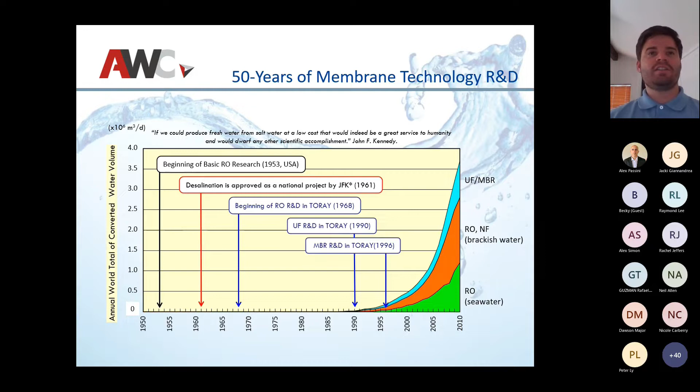We'll touch a little bit more on the membrane R&D technology in general and how Toray fits into it as well. As you can see, in 1953 was when RO started. And then in 1961, JFK approved desalination as one of the national projects, given the importance of water. In 1968 was when Toray got involved on the RO side of things, and it's just expanded from there. And you can see in the 90s, we joined on both the UF and the MBR technologies as well. So just to show how long we've been in the membrane side of things and lots of experience with all of our products. All right, now into the good stuff.

Submerged membrane bioreactors. I know there has been another webinar on MBRs before, so I'll kind of touch a little bit on it. But essentially what we're looking at here is a conventional tertiary process on the top. You've got your clarification, then your aeration basin, followed by secondary clarification and your sand filter. Obviously, your sand filter is going to be your tertiary process, but as we all know, sand filtration, while it provides good quality effluent, isn't the greatest quality effluent depending on what you want to do with that discharge water.

Whereas on an MBR process, depending on how you want to do it, you can even eliminate primary clarification like you can on a conventional. But what we're looking to do here is really combine the biological and a membrane process into one so that you can get really, really high quality effluent that can be either used for discharge, reuse, or even direct feed to an RO.

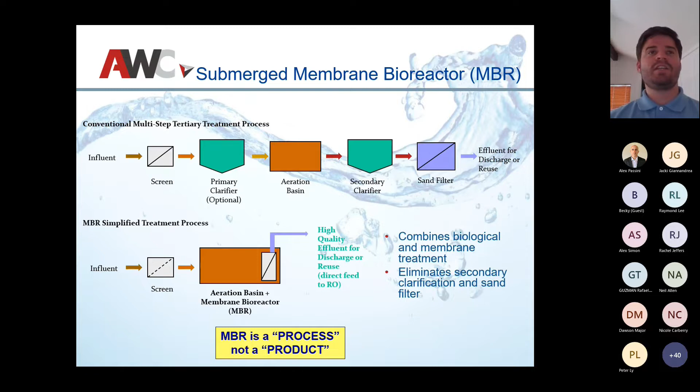So here in California, where I live, even though we are pretty forward thinking about water, we're not as forward thinking as it is in Canada. So we know a lot of them use MBRs up there. So again, it really just gives you a good quality effluent water for discharge. And it combines a lot of the processes together so that you can really shrink the size of that total treatment process.

So you may be thinking, well, why would I want to go through all the extra effort of an MBR? Really, it comes down to that effluent water quality and what it allows you to do with it. Obviously, some of these parameters are driven by the biological process ahead of it and partially removed by an MBR. Things like BOD, if they're in a soluble form, are obviously going to pass through our membrane. But if it is bound up to other solid particles, then it can be removed.

And then things like suspended solids and turbidity are really what the MBRs are honing in on to remove. So again, we can have a nice quality effluent. And I'll touch on it in a minute, but one thing that I did mention on the previous slide is we do like to stress that MBR is a process. It's not a product.

So expecting to be able to drop a membrane bioreactor into, let's say, a secondary clarifier and just make an MBR start working, while it's possible, it's not really always going to work that way. So it is really important that you consider the process as a whole. And the reason I mention that here is because some of these limits like TNs and TPs are also impacted by our biological process ahead of it. So that is really important to remember that the MBRs are really geared towards suspended solid and turbidity removal.

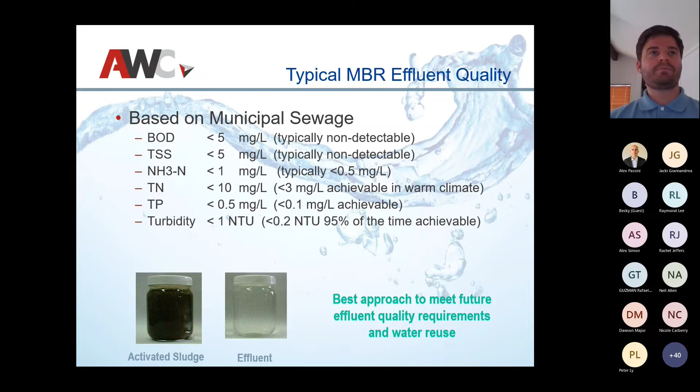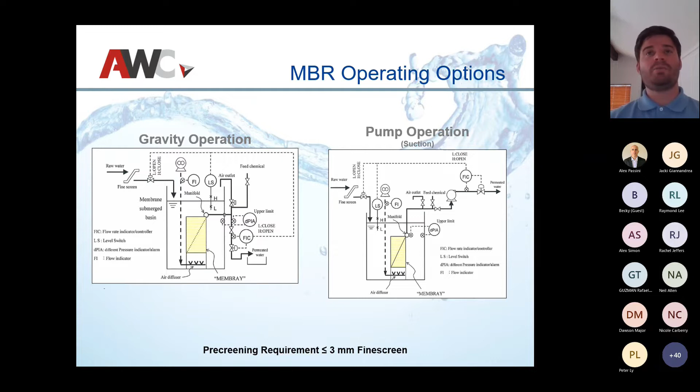If you start to lose aeration, that's when you start running into the other two problems of clogging and consolidation. So membrane clogging is going to be next. We've got these little particles in the presence of the membrane, and they're going to start passing through the pores eventually if they're too small and our particle size isn't optimized in the MBR. And those will start clogging those pores, harder to get out.

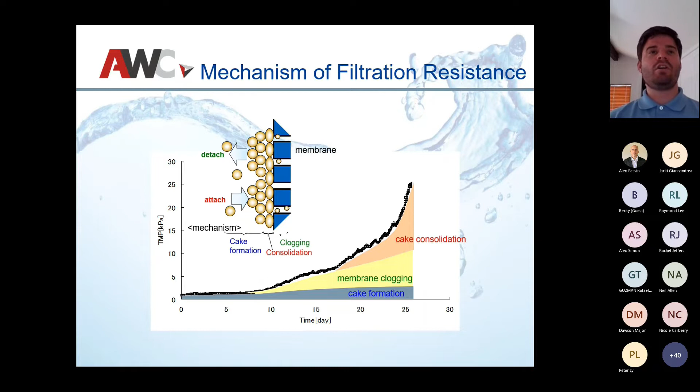So some of the critical operating parameters surrounding MBRs in general, I'm sure these are not unique to submerged: effective pre-screening is absolutely critical. So if we have long fibrous materials, or even, it's unlikely, heavy debris that could damage the membranes, it's really, really important that we effectively pre-screen those to remove them from the system so that they're not ruining these nice fragile membranes.

Maintaining aeration, I'm going to say, is one of the most critical, if not the most critical. You can get away with some of the others being not optimal and still be able to run, maybe not the happiest, but you can still run it. But if you lose aeration, like we discussed on that previous slide, is when you're going to start running into a lot of these other problems like cake consolidation and clogging of the membrane. So aeration is absolutely critical to maintain properly.

And lastly is prevent the airlock of the pump. This is more of just an operational nuisance that we see. A self-priming pump can help you eliminate this issue, but again, we're really just looking at it as more of a nuisance than anything. You can also use things like an eductor to suck the air out as needed.

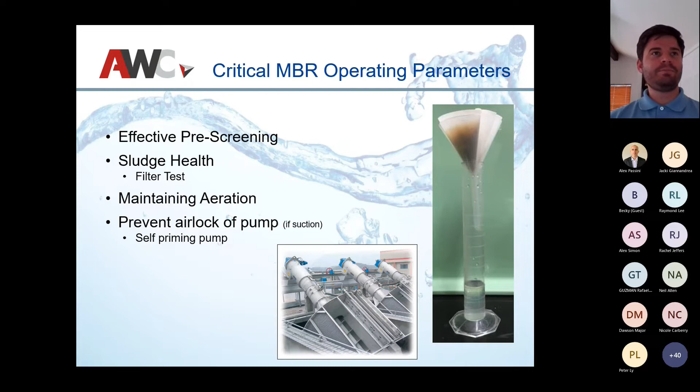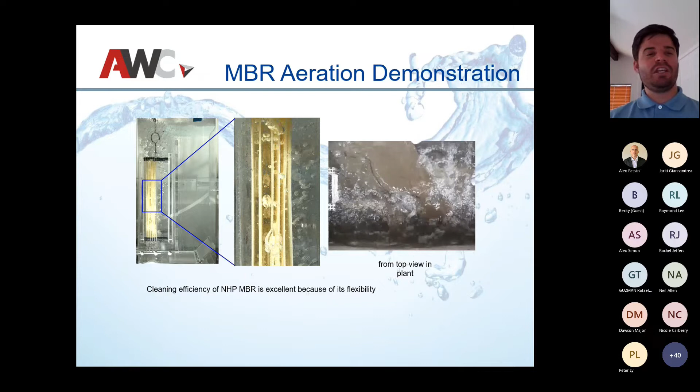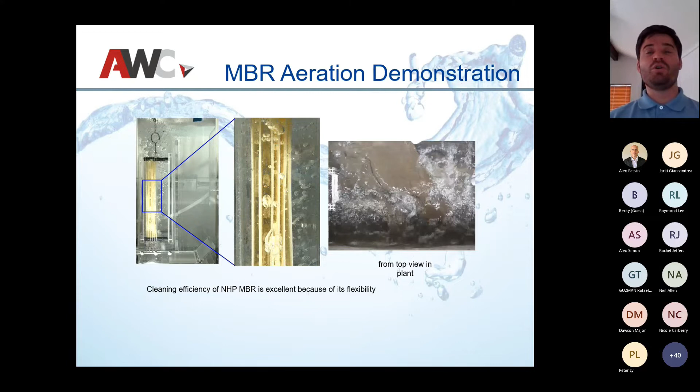And the last video, I really like this one because if you look closely, you can actually see a lot of the cake coming up and out from between the membranes. And again, this is just really to hit that point home that as long as we keep it in just a standard cake formation, we're not so bad. Once we get into that consolidation step that we're really squishing it into the membrane surface, obviously we're going to have a much harder time removing it and require things like a physical hose or something like that really to wash that sludge out.

So how do MBRs manage the fouling? Obviously on the flat sheet and the hollow fiber, there are some commonalities, but there are a few differences as well. They both have aeration on the hollow fiber and flat sheet, but on the flat sheet side, we have a few different, I guess you would say, configurations of air that we can offer. The standard coarse bubble, which everyone's pretty used to, and then we've got medium or fine bubble as well.

The nice thing about the medium and the fine bubble that we can offer now is that they're both, I wouldn't say clog free, but they're kind of the EPDM sock style. So they really don't clog like a coarse bubble would, where it's just a pipe with holes drilled into it and you can get sludge intrusion into them to clog it. And so again, using those medium or fine bubble are really good options to make it a much more operational and friendly system. And the medium bubble actually brings us up to the same flows as the coarse, so it's kind of nice that way.

On the aeration side for hollow fiber, the one benefit they have, and we'll touch on it a little bit later, is they do have intermittent aeration depending on which configuration you have. And some manufacturers even have unique leap type things where they do one big bubble or things like that. Hollow fiber, the one unique aspect is you can backwash it. The one downside to this is obviously you do lose some of your recovery, and backwashing does make your sequencing of the system quite a bit more complicated.

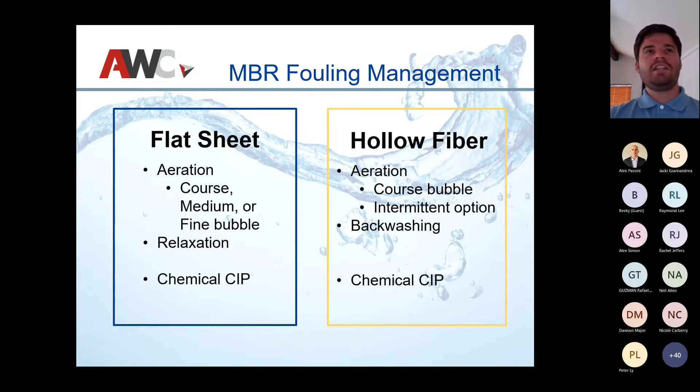On the flat sheet side, you think, well, if you're not backwashing, how are you getting rid of those solids? We do have a relaxation step. Essentially, we just turn the filtration pump off. On an average application, we're looking at 9 minutes filtration and 1 minute relaxation. And again, that relaxation step is really to do what we showed in that previous video, to let that cake formation just really get removed from the membrane matrix in between them. And then lastly, both of them obviously have a chemical CIP option, more on an as needed type of basis, but it is an option for both.

So real quick breakdown into the advantages and disadvantages of each. I may have some biased opinions, obviously, but we'll put that to the side for now. One nice thing about flat sheet is, as I mentioned before, you can operate in either suction or gravity filtration, and that gives you flexibility. They are extremely easy maintenance in the fact they have very minimal moving parts. You really just have your membrane block, and then you have your filtration pump, a few valves, and your aeration blower. So it's pretty straightforward and simple, very minimal sequencing. They can also operate at higher MLSS values, which we'll touch on later.

One of the disadvantages to flat sheet is, and we'll be pretty honest, is that our slightly lower packing density and energy efficiencies make us a little less competitive on large facilities, typically anything larger than 5 MGD. Their intermittent aeration is one of the big reasons for less energy usage. Obviously, we are 100% aeration all the time, so that is one downside.

Obviously, on the hollow fiber side, we do have improved packing density and energy usage, and backwashing is possible. But depending on who you are, you could think backwashing may actually be a disadvantage because it does reduce recovery. And also the fact that hollow fiber have to operate at lower MLSSs does require a larger pretreatment basin. I'll touch on that a little bit later, so I won't go too much into it.

But next, external. Again, I'll be pretty frank here. We don't have a huge amount of information. A lot of the companies are a little smaller, and we don't see a huge amount of them. But one thing that we can see is operational flexibility, given you have the ability to push at the pump or pressure. The pump gives you a lot more flexibility to push water through, especially on nasty applications.

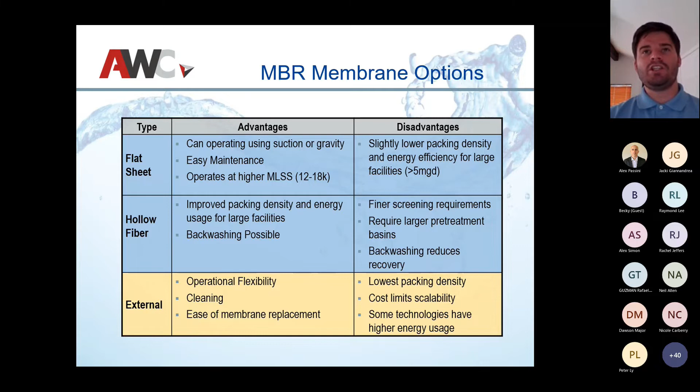So as I mentioned before, just to give you a visual of what the flat sheet versus hollow fiber MLSS difference really gives you, you can see here on the top we've got our flat sheet MBR, and typically on the low end we operate at 12 grams per liter, or 12,000 milligrams per liter. On the high end, we're looking at 18. As you can see, the hollow fiber on the low end, you're looking at around 4, all the way up to potentially 10.

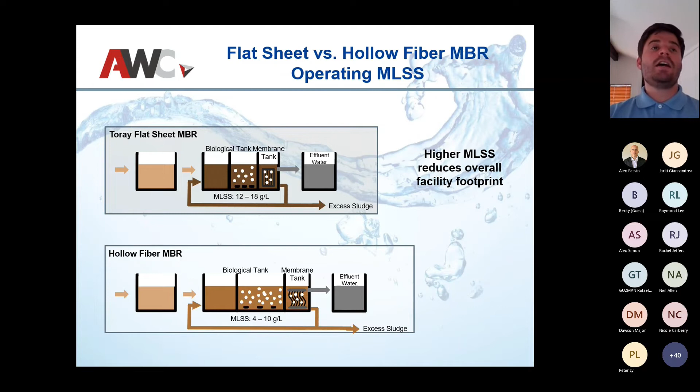And really what this means is, while our packing density may be a little lower, and I will admit I didn't size this correctly, our membrane tank should be a slight bit bigger because our packing density is a little bit lower. The overall treatment process footprint can actually be much smaller due to that higher operating MLSS. So if we compare 12,000 versus 4, that means our primary process can be 1/3 the size it would be for a hollow fiber system.

And looking at a side-by-side operating comparison, this is a nasty industrial application, and that's really where, not that we shine, but we tend to really see the difference between hollow fiber and flat sheet. Our flat sheet works great on municipal as well, but the one downside to hollow fiber is, due to all the little fibers, you have a potential to collect foulants up at the top of the headers where the aeration is pushing it all, whereas on the flat sheet, we can slough all that off and don't run into that same issue.

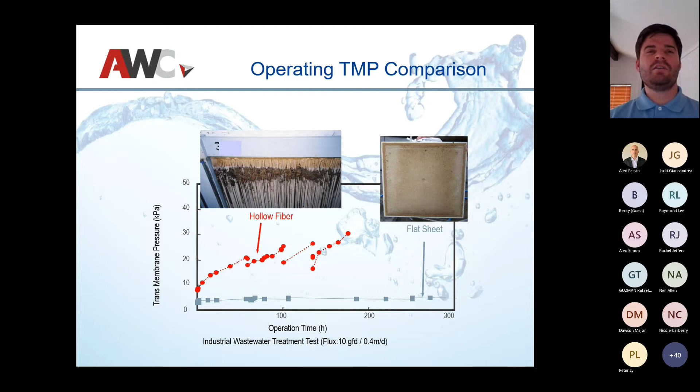And that's what results in the TMP difference. You can see the hollow fiber had a much more rapid TMP increase versus the flat plate. Another nice thing about the flat sheet is, if you do get yourself in a bad situation where you've completely plugged it up and look like the hollow fiber, it's much easier to rinse them off with a low pressure hose and not damage the membrane than it would be for a hollow fiber, where you risk breaking membranes a little easier.

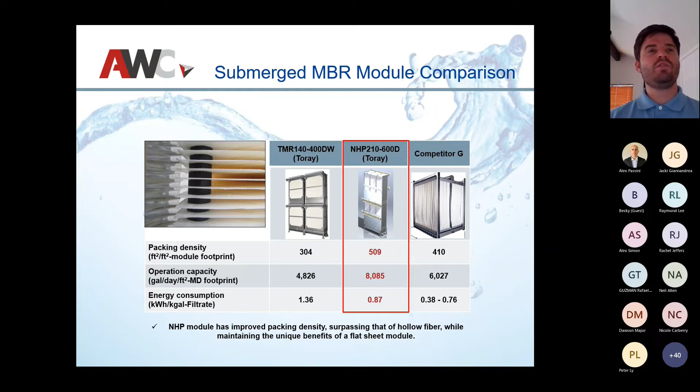Really quickly, the only reason I like to touch on this one is to show we have been improving our packing density to get closer to some of our big competitors in the MBR space. I will admit that the energy consumption is a little bit higher due to our continuous aeration. But again, we're getting closer and closer. And for small facilities where you're really looking for a simple, robust process, going with these flat plates just makes it so much easier because there are so few moving parts and so few things to troubleshoot.

I'll touch on this just really quickly to show you a little bit about the flexibility of our modules. Obviously, we've got various different sizes, and the one nice thing about them is they're all essentially stackable. So it kind of gives you the flexibility of messing around with how you see fit.

The smallest one on the left-hand side would be perfect for containerized units. That one in the middle, the 300S, is perfect for municipal applications. And then that one, the double high, the 600D, is perfect if you've got minimal footprint and you're really, really trying to optimize how much membrane area you can get into that small space.

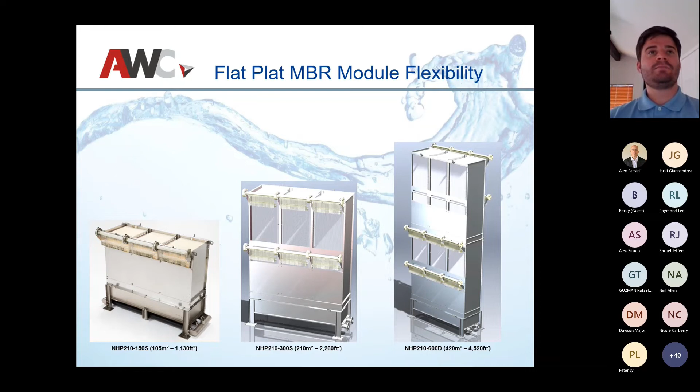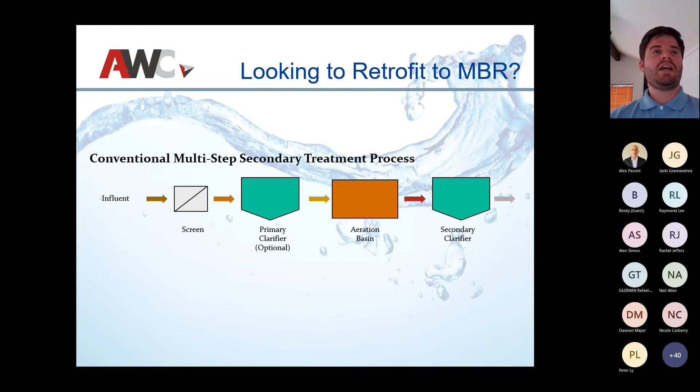And lastly, what we'll touch on is if I've got a conventional multi-step, maybe secondary treatment process, and I really, really wanted to do MBR, how difficult would it be for me to do that? And in reality, it's actually pretty simple. Many times we can actually retrofit a secondary clarifier to become an MBR basin.

And what this means is now you can make your current secondary clarifier both your secondary and your tertiary treatment, all in one step. You don't need to increase the facility size. So it really makes it a nice retrofit potential if there's the opportunity. Obviously, it's not an option for all plants depending on the tank configuration of the clarifier, but I would say 80% of the time, maybe a little bit more than that, we are able to directly retrofit a secondary clarifier.

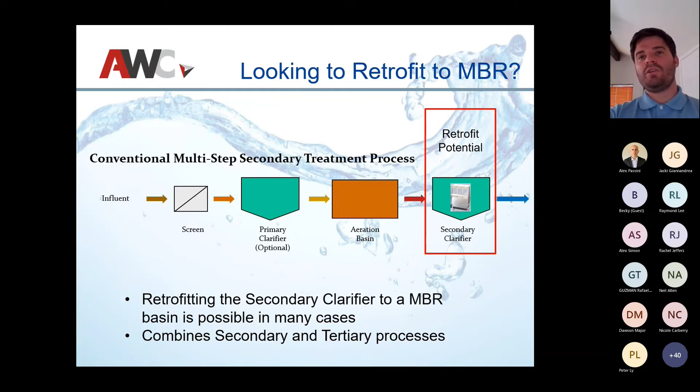And again, it just gives them the ability to have excellent quality effluent. Maybe they want to go to RO for advanced reuse and they can use that RO permeate for some process water within the facility. Again, it just gives them a lot of flexibility. And that's it.

Excellent. Thank you, Charles. That was quite a lot of information to be packing within those 18 minutes. I think we were like right on time too. So let me move over to my screen here and make sure I can see this. So we did have a lot of questions that came in over the chat, and thank you for that. I actually have a short list of questions myself, but maybe we can go over the ones that came over the chat box here. One second. Let me see if I pull them up.

So one of the first ones that came up was from Tom here. It says, do you use intermittent aeration or continuous aeration? So for the flat sheet on our side, we do continuous aeration. The challenge, obviously, as I mentioned, is if we at any point lose aeration, we start to get cake consolidation, and that's where we run into performance issues. So on the flat plate side, we are looking at continuous aeration, which is why the energy usage is a little bit higher on large facilities.

Okay, and next question here is, can you speak generally about the advantages and disadvantages of having the membrane in a separate reactor, like a separate compartment? Yeah, and so I guess the big disadvantage is it makes your process design a little more complicated if you're trying to do all the nitrification, denitrification steps. It can still be done. It's not like it's that big of an issue.

One big advantage is if you include them in the same basin, and you can do this if they're in separate ones as well, is you can actually take advantage of the MBR aeration as part of your aeration oxidation process for the activated sludge process. And then when you cycle that back to the front end, you can do the other part. So you can take credits from the aeration on the MBR side if you have it within your main basin as well. So there's not major drawbacks or benefits to both sides. It's really how the facility should be designed. There are some small benefits to each one though.